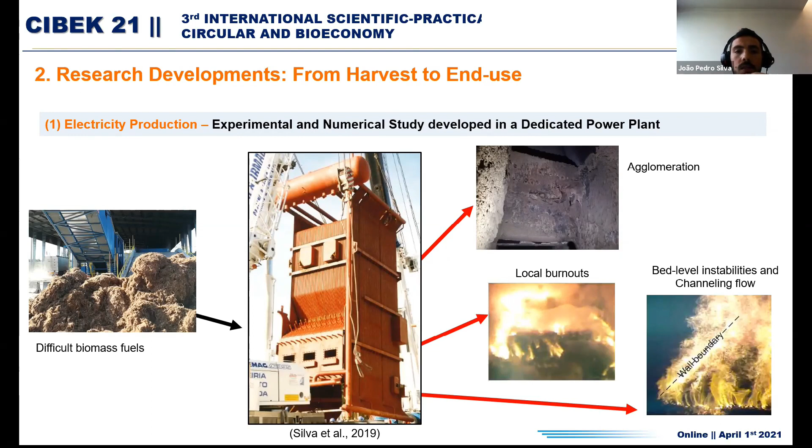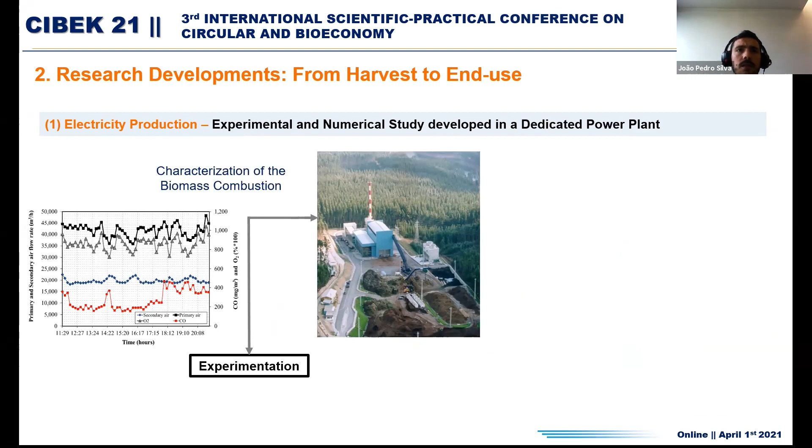So in this regard, to give some scientific explanations to this phenomenon and characterize and propose some strategic alternatives to improve the combustion process, experimental work and CFD, which is an acronym for computational fluid dynamics, modeling have been developed by our research group. The experimental activities cover mainly the combustion process on the grate, where the influence of parameters such as primary airflow rate, the distribution on the grate, and the vibration periods were evaluated by our research group. And of course, a detailed physical and chemical analysis of the biomass was monitored, as well as the flue gas emissions with the boiler control analytical instruments.

The results of this type of activities were very useful for us to understand the impact of the different key parameters on the biomass conversion inside the boiler, and the impact on the gas phase emissions. The observations are very important to validate the numerical model, which is a powerful tool to predict the flow and biomass conversion, and to anticipate some problems that can occur during the combustion phase. Inside the boiler, and specifically on the grate, we have low comprehension of the phenomenon, and with the CFD model we can understand it exactly, which is a great advantage for us, and a promising alternative to meet economic and environmental demands on the operation of grate furnaces.

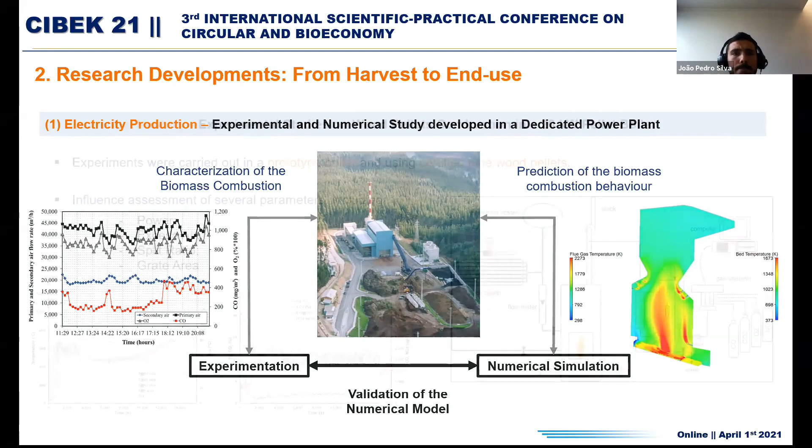Regarding the residential heating subject, experimental and numerical works have been developed by our research group, in a 20 kilowatt prototype pellet boiler present in the Mechanical Engineering Department of the University of Minho. The experimental works, as the previous one, are very useful to understand the influence of different parameters. These experiments were performed with certified wood pellets and were carried out to analyze four parameters: the influence of power, which is related with pellets mass flow, excess air, the split ratio between different quantities of air supplied in the boiler, and the influence of the grate area where the pellets combustion takes place. This one was also analyzed to understand its influence.

Of course, these sets of experiments are very useful to get, as I said before, a better understanding of the operating conditions and the combustion process inside the equipment, and to obtain more information to validate the numerical models that we are doing.

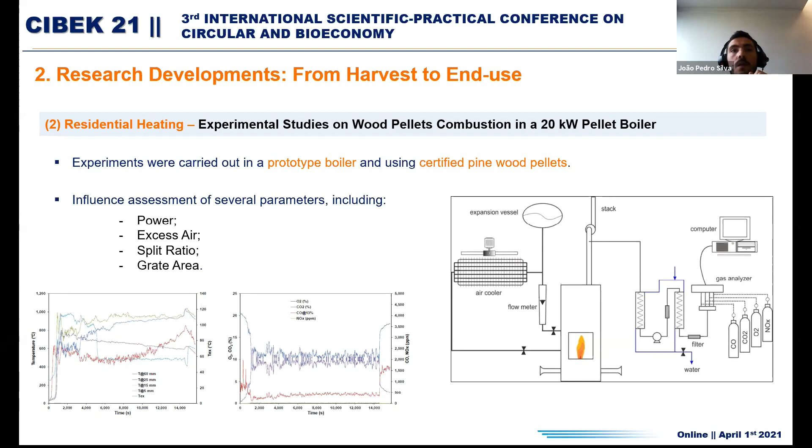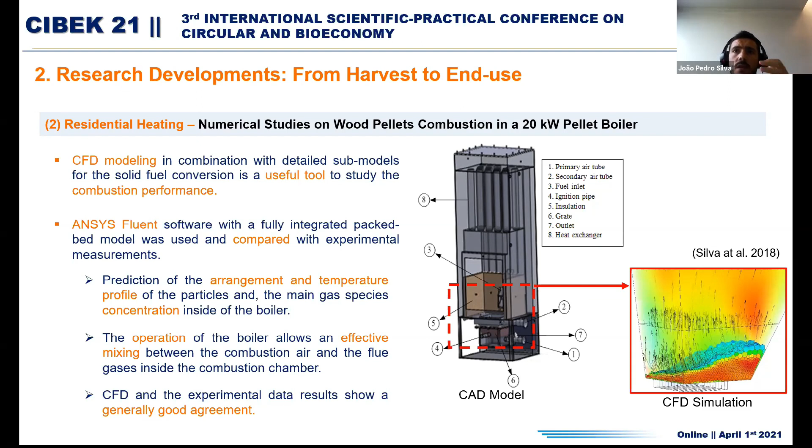Regarding the numerical studies, CFD simulations in combination with detailed submodels for the solid fuel conversion have been developed by our research group. These simulations are very useful to predict the combustion not only on the grate but on the freeboard, which is very difficult to understand with the experimental activities. So the prediction with this model was very useful, because we predicted the arrangement and temperature profile of the particles on the grate, and the main gas species concentration inside the boiler, as you can see in this figure. CFD results show that the operation of the boiler allows an effective mixing between the combustion air and flue gases inside the combustion chamber, and a generally good agreement between the computational fluid dynamics model and the experimental data was obtained, which is very good for us.

Regarding the other subject that our research group analyzed, pellets production, an energy and exergy analysis of the sawdust drying process performance of a facility with an installed capacity to produce approximately 2 tons per hour of high quality certified pellets over 2 different seasons of the year was performed.

Only to understand the importance of this subject, Portugal has an extensive forest area, about 31% of the land area, whose products can be used as an energy source, and an attractive option is the use, of course, of the forest residues byproducts to produce pellets. Pellets are characterized by their reduced moisture content and higher calorific value when compared with the biomass or wood chips

in general. The production of the pellets involves several processes, from the collection of raw material to drying, grinding, granulation, and packing. Drying is one of the most energy intensive, since the pellet's moisture is controlled. And this was why thermodynamic modeling through the use of first and second law analysis was used to simulate the energy conversion process in a pellet facility, and to understand how to improve the efficiency and to further identify potential improvements on the facility.

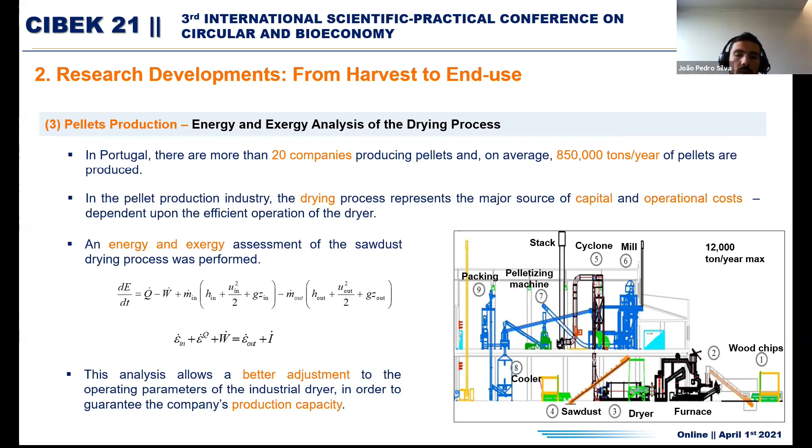Thank you, João. I think, are you hearing me now? Yes. Yes. Okay, so

João presented the 3 ways of converting biomass into energy, and now I think I'm going back again to our supply chain costs, because only with a comprehensive analysis of this supply chain we can properly assess the economic and environmental viability of forest biomass.

Talking about agriculture and forest sustainability, we will try to promote the production and use of renewable energy sources in the forestry sectors, and also to promote the role of bioeconomy. So we think we have a future here that we have to talk about. The supply chains from forest biomass, in our thoughts, may be grouped in 2 main categories.

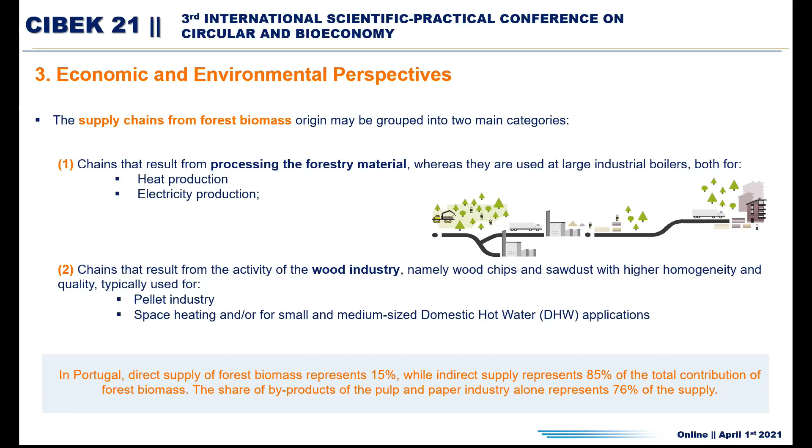In Portugal, we have chains that result from processing the forest material, and we have chains that result from the activity of the wood industry. In Portugal, the direct supply of forest biomass represents 15%, which is a good way to improve this.

Regarding the biomass from forest materials, we can talk about different stages: forest production, energy generation from forest products, transport, and residuals and waste management. So lots of stages that we have to think about in terms of costs and opportunities. But most of these studies are focused on the evaluation of three main impacts: human health, ecosystems, and resources.

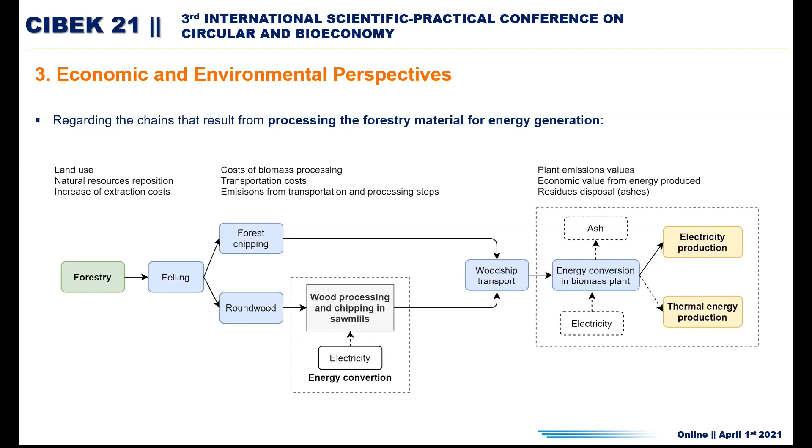In this presentation, we would like to model the biomass supply chain in terms of logistic costs, and we try to assess the environmental, economic, and social sustainability of this supply chain. In Portugal, forest byproducts play an important role in energy production. One of the problems of using forest resources is related with the high costs of its extraction, processing, and transportation, creating a complex logistic problem.

We are now dividing this problem in 4 parts: harvesting and biomass collection, then pre-processing, transportation, and storage. We will go through this. The costs associated with these activities vary according to a specific biomass supply chain. For each logistic activity, a cost function was developed to estimate the biomass supply chain cost.

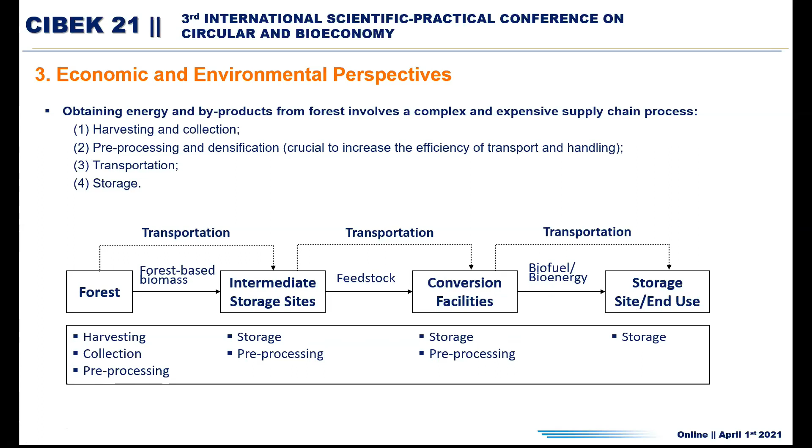Talking about harvesting and collection costs, the harvesting cost function takes into account the machinery, which means the capital costs, the operating, maintenance, and fuel costs. The labor costs are also considered, the total operating hours and the amount of biomass collected per hour. The costs can also depend on the location.

We know this is very important, the location access that we have to biomass. Also the forest materials characteristics, also the seasonal availability, and this will interfere with our costs mainly. But especially for mechanized felling, the labor costs represent the most expensive factor because we need specialists to operate the machines.

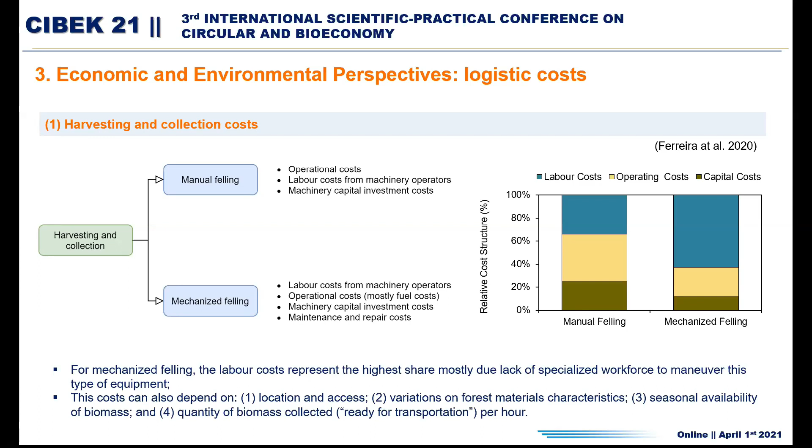Regarding the processing and densification costs, they are affected mainly by the granulometry of biomass, which requires different equipment for different types of operations. Although pre-processing biomass at facilities is sometimes considered efficient because we can use heavier machinery, most of the time the pre-processing of biomass at forest sites is the most economical option because the machinery is cheaper, requires less handling operations, and also reduces the transportation costs.

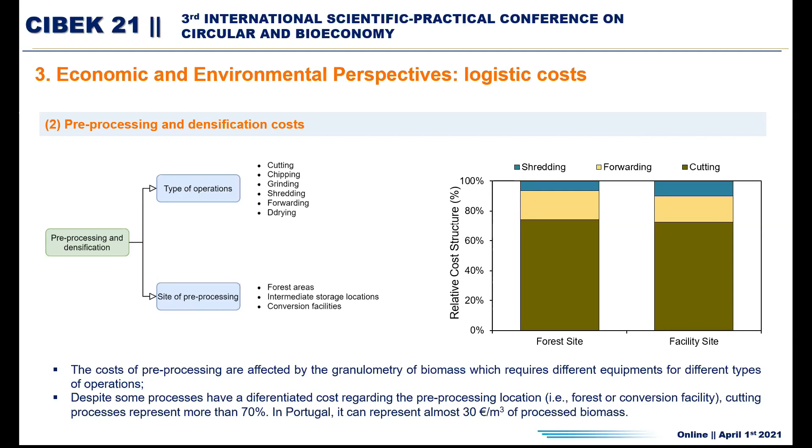The cutting process represented more than 70% of pre-processing costs, and in Portugal it can represent almost 30 euros per cubic meter of processed biomass.

Transportation. The transportation cost function is the most complex to define because there is a high variety of transportation vehicles. Therefore, to reduce the complexity, and since in Portugal transport by road is the most common, we developed only road transportation. The transport will depend on the load transportation costs, the capital, the fuel and maintenance costs of the vehicles as a function of the distance.

We have here the graph, and according to a preliminary assessment, the transportation of loose wood is much more expensive than the transportation of wood chips. In Portugal, most of the forest biomass is transported locally, and the baseline cost is about 18 euros per cubic meter of biomass transported.

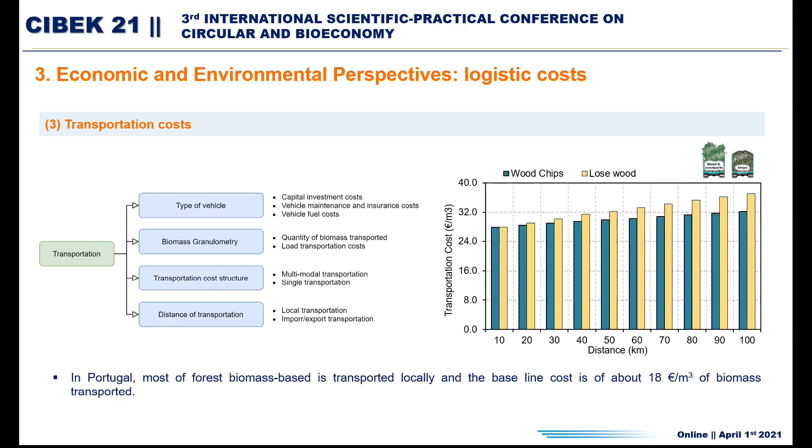Regarding the storage, of course it depends on the inventory holding capacity, but it also depends on the amount of biomass that can be stored. We consider in our model two scenarios: biomass storage in open air and biomass storage in covered storage facilities.

We have these costs. For instance, it is important to know for storage locations if biomass is stored at intermediate facilities, or if it is transported to storage units located already in a conversion plant. It also depends on the storage capacity demand, and of course, as I told, on the type of storage, if it's open air or a covered enclosure.

In sum, we try to estimate the costs of the forest-based biomass supply chain, but we see it's a very complex problem with a lot of variables: the demand and supply driven collection, the collection of biomass in different forms, the storage at intermediate facilities. Biomass quality deterioration is also a problem. Operational transportation planning and planning the processing of biomass. The models must include all these aspects in order to estimate the supply chain costs more accurately.

We can also talk about other ways of using biomass, because forests are an excellent source of wood for new low carbon building materials, and a source of cellulose for new and greener biotextile and bioplastic materials. And also lignin is another significant component of wood that has shown promise in obtaining new and more sustainable materials. Incorporating lignin in concrete production is also a new product that we have to consider when we study biomass in an economic perspective.

So just to finalize, the final remarks about the use of solid biomass. In the long term, the future growth of heat and electricity production using biomass will depend, of course, on the implementation and strategic decisions defined by each member in the National Energy and Climate Plan. This attests to the willingness of our society and the industrialists to substitute their use of fossil resources with solid biomass. In Portugal, currently, projects for new dedicated biomass power plants will be discouraged because they are quite low efficiency, and there are environmental pressures to use energy sources more efficiently.

The main point will be the conversion of existing CHP plants to move to biomass products. Furthermore, it is important to point out that forest biomass is also an excellent source of wood for new low carbon building materials, new and greener textiles and bioplastics.

So this is a very short presentation of our work in, as I say, experimental and computational ways. We have been doing the modeling of the conversion of biomass into energy and heat, and also this model that we've been developing will help us to find the costs of the biomass supply chain.